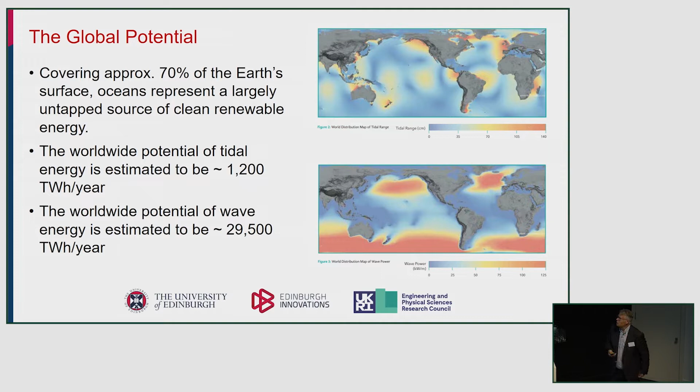Then what about the technology itself? So we've got wave and tidal technology. The first that I'll cover is tidal.

This is a device from Orbital Marine Power. They're an Edinburgh-based company that we collaborate with here at the university. They have what they call their O2 device. It is a nascent, emerging technology. This is the first full-scale commercial prototype that they're deploying in a commercial environment. Its capacity is 2 megawatts, so that gives you the opportunity that could power in excess of 2,000 homes. So really quite a large and significant device.

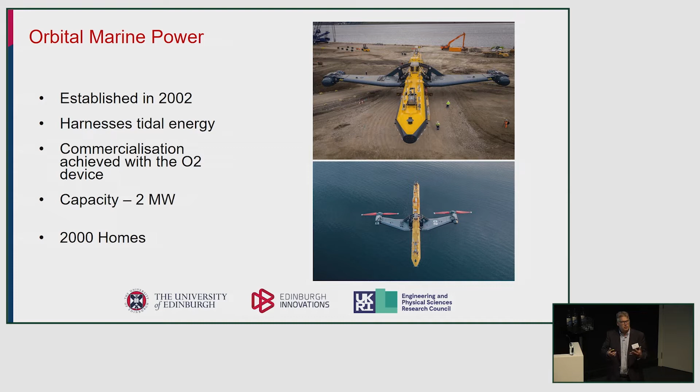You can see on the top screen there the people alongside it. It is extremely significant in size. And also you see it in its deployed position in the sea there. Although these look very impactful when we're looking at them on the screen in front of you here, there's almost no visual intrusion at all once they're several kilometres out at sea.

Sticking with tidal, another Edinburgh-based company we collaborate with is Nova Innovation. They have a much smaller device at 100 kilowatts. They have 6 of these devices deployed in an array system, a tidal energy farm in the Shetland Islands, and they're currently using that to supply the local grid and decarbonise the electricity system in the Shetlands.

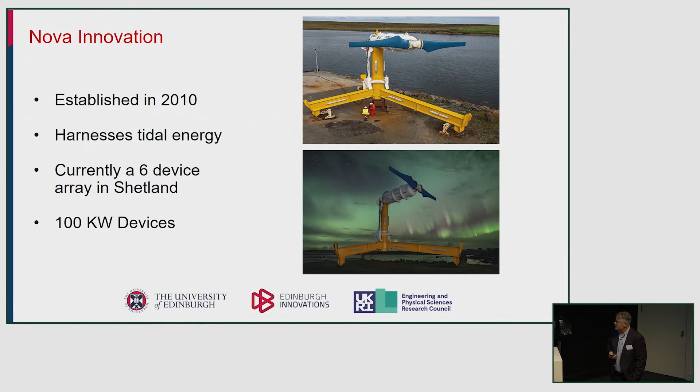Moving to wave power, if I said that tidal energy was an emerging, nascent technology, I would say that wave energy is probably 5 years behind it. The technology there is still getting design convergence and it's still being tested. This is another Edinburgh-based company, Mocean Energy. They have a 10 kilowatt prototype that's being tested currently at the Marine Energy Test Centre in Orkney, where many of the world's devices are tested.

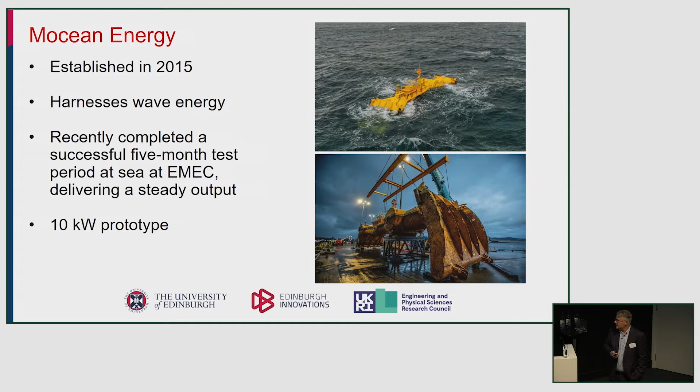But not to think that all the devices in the world are based in Edinburgh, I've picked one example here of wave energy from Sweden. They have tested their device in Scotland, at the Marine Energy Centre in Orkney. It's a smaller device of several hundred kilowatts, but they will operate them in 10 megawatt clusters, so much bigger farms in a similar way to wind. Hopefully that's given you a flavour of the types of technologies that are out there that we're using to capture that untapped resource that's available.

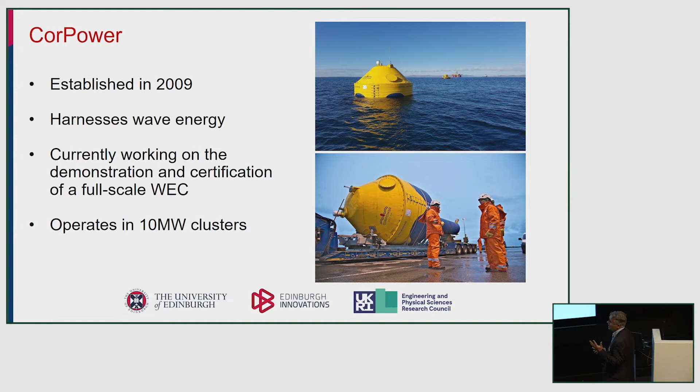But then, what's the benefits of doing that? How much could we deploy? If we look at what we could do at a UK level, if we were to meet the targets for the cost of this technology set out by the European Commission in their Strategic Energy Technology Plan, which are quite modest, then we've done modelling within the university that shows there could be up to 12 gigawatts of both wave and tidal power by 2050.

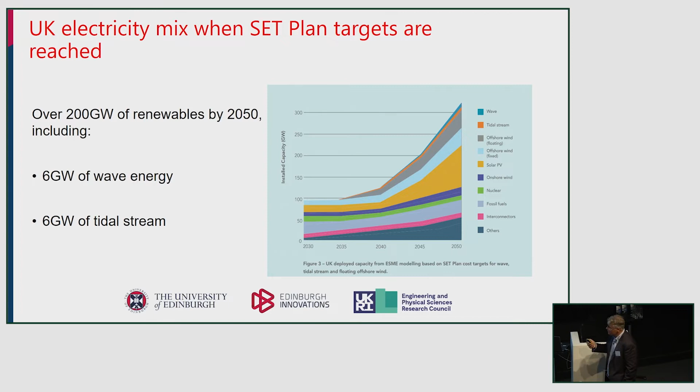And if you were to reduce that cost, then we would deploy even more in the energy mix. So anywhere between 5 and 10% of all the renewables that we have in the system could at least come from wave and tidal power in the future. So maybe modest overall, but still a very significant part of the overall energy mix and the decarbonisation of the UK energy mix. But if we were to do that, and successful in doing that, even with those modest amounts, what does that mean for overall society?

So what that means in terms of financial benefit is really quite significant with regard to the number of jobs. In the case of many renewables, we're importing them from overseas, whereas with wave and tidal power, you can see from the number of Scottish technologies that I showed, we really are leading the way within Scotland and the UK with this technology, and hence a very large proportion of the supply chain is based in the UK and Scotland. So we could have anywhere between 16 and in excess of 40 billion of economic benefit to the UK economy. To put that in perspective, it's double the automotive, or almost 3 times the entire UK automotive sector, bigger than the entire telecom sector, and almost a third of the entire UK construction sector. So it's a very significant part of the UK economy potentially in the future.

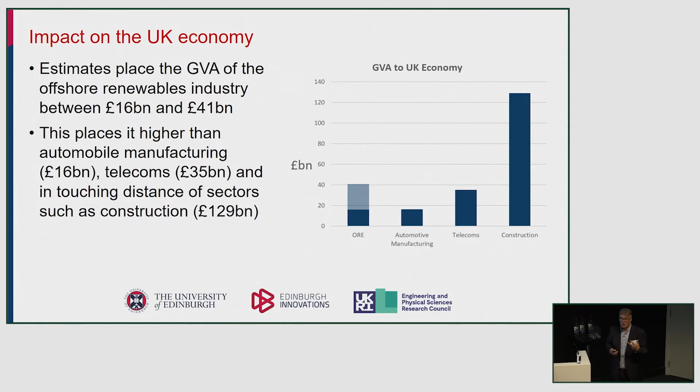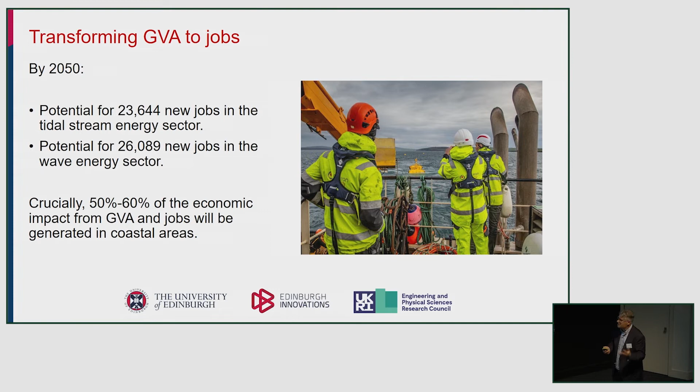And how does that translate to jobs? We could have approximately 50,000 jobs by 2050 from this sector, playing a real part in the just transition. And probably the most crucial part here is that the vast majority of these jobs will be based in coastal areas, where historically these have been fragile communities at risk of depopulation. So the right jobs in the right place is the message to take away here.

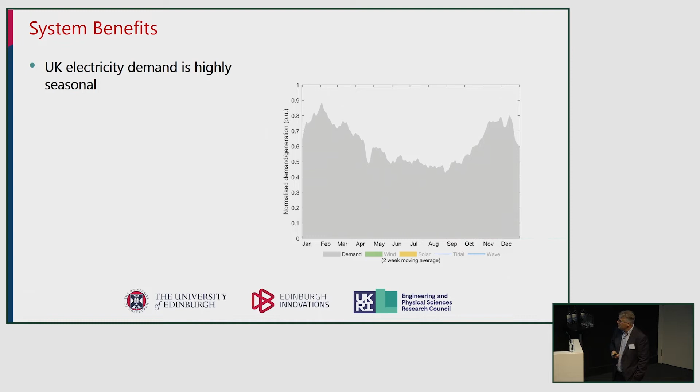Thinking about what this does as we move towards 2050 in the overall UK energy system, we will hopefully have more and more renewables in the system as we move towards a decarbonised overall supply. The electricity demand in the UK is highly seasonal — we have much higher demand in winter than in summer, and this grey block shows the overall profile of our electricity use. If you map wind generation onto that, it's reasonable, since it's windier in winter than summer, but quite often there are grey peaks where there aren't green peaks, which creates a real problem for how we balance the overall system. If we bring in solar, it actually makes things worse, since we have lots of solar power in the summer when we don't necessarily need it, but not nearly as much in winter when we definitely need it.

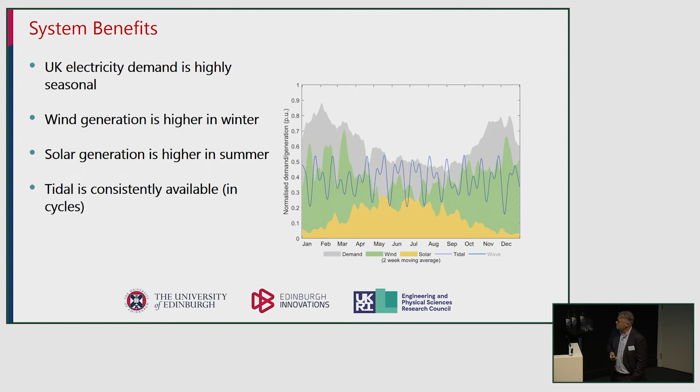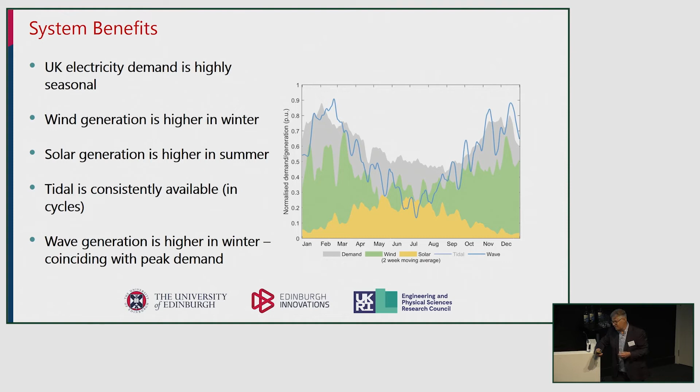So what happens if we bring in wave and tidal? Tidal is cyclical, and you can forecast that for hundreds of years in advance, so we can look at almost like a varying base load in the middle there, which will help balance the overall system. But if we bring in wave power, it almost matches completely — it really helps match the supply with the demand. So as we have much more offshore wind, onshore wind and solar in the system, wave and tidal is a real enabler to helping balance the overall grid. And when I say helping balance the grid, it makes it cheaper to balance, so there's a benefit to the electricity companies and the bill payer. But there's also a huge benefit to decarbonisation — for every peak in demand that wave and tidal power helps remove, that's less gas turbines being used to meet that demand. So you're decarbonising the grid at the same time, a real enabling benefit there.

So my takeaway message for why we're interested in this sector is that, as I've just described, it is a real enabler for net zero. As we have much more intermittent renewables going into our system to meet our net zero targets, wave and tidal power really makes it easier to balance the overall UK system. And at the same time, because this technology is currently being led at UK level, and I would even say at a Scottish level, it really brings high quality jobs and economic benefits — those jobs in the right place. So potentially having a big addition to a just transition as well as meeting the net zero targets.

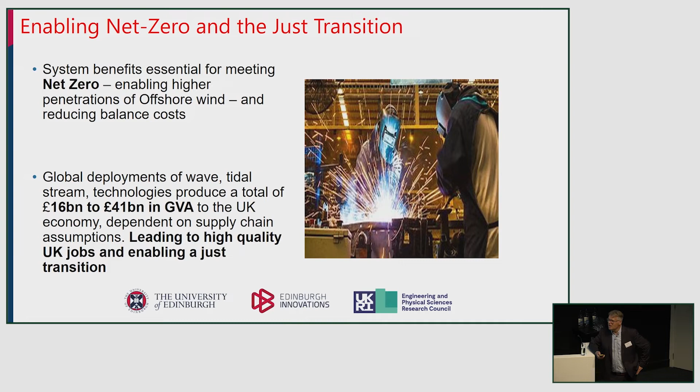So what are we doing at the University of Edinburgh? Hopefully I've given you an overview of the potential, the resource, and the potential benefits that we have. What are we doing at Edinburgh to help support this emerging sector? Well, first of all, we have some fantastic facilities, and first I'll cover the FloWave test facility based at our King's Buildings campus.

Opened in 2016, it is the most sophisticated test tank in the world for testing wave and tidal devices. It's a 25-meter diameter pool, covered in wave paddles. Below the surface it has tidal turbines generating tidal flows throughout the pool.

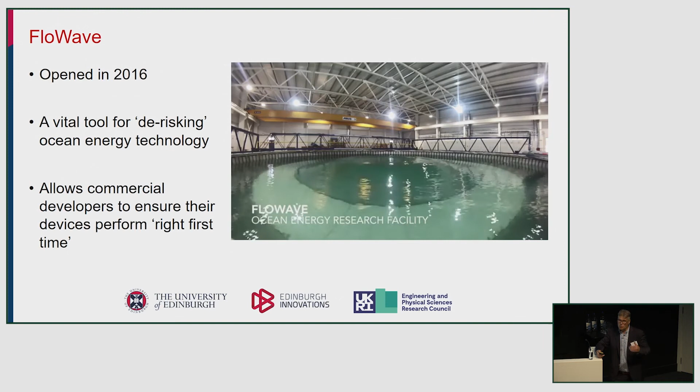We can generate and simulate test conditions for any site in the world at any location. All of the tidal and wave developers you've seen slides for today have tested and de-risked their devices in the FloWave test facility, as well as many other devices from the UK, Europe and around the world, all making their way to Edinburgh's FloWave test facility to de-risk the technology before it moves into harsh offshore conditions.

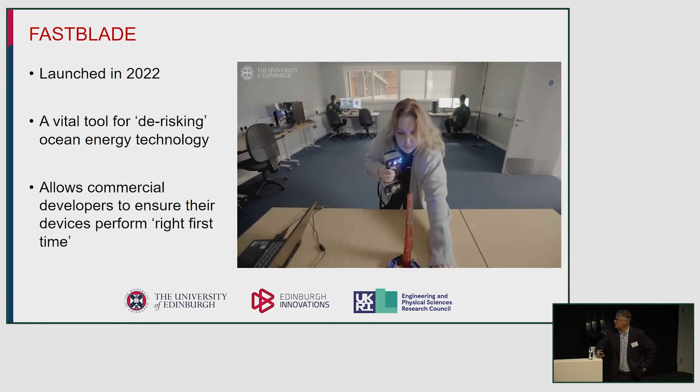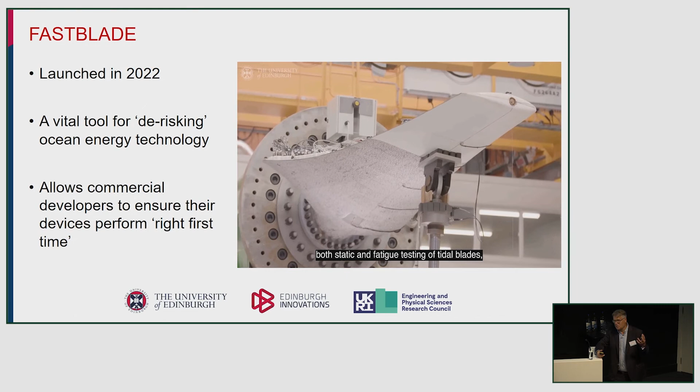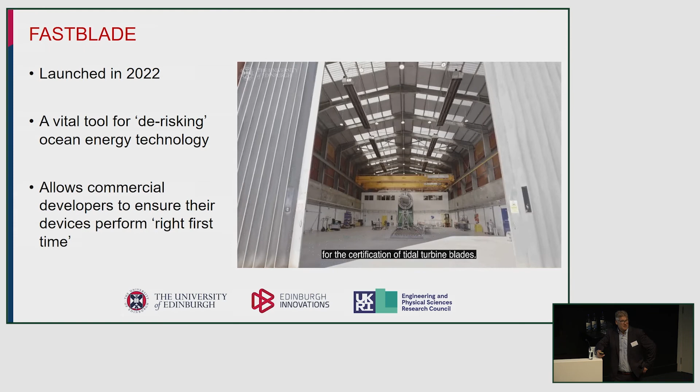As well as the devices themselves, we have a brand new test facility that just opened earlier this year, the FastBlade test facility. As well as testing overall devices, we have the world's first tidal blade testing system, based in conjunction with Babcock in Rosyth on their site across the bridge. It's a world-leading test facility to de-risk the technology of tidal turbine blades before they go into harsh conditions.

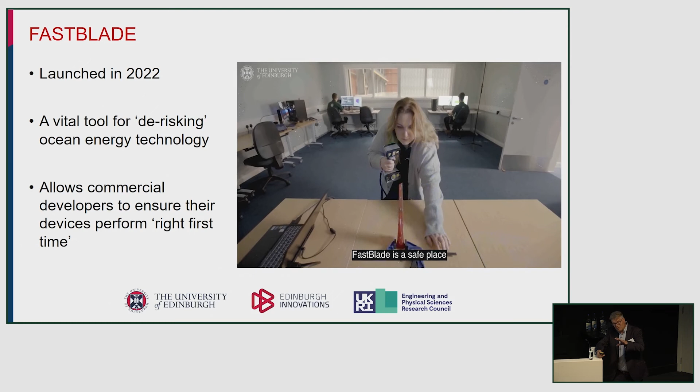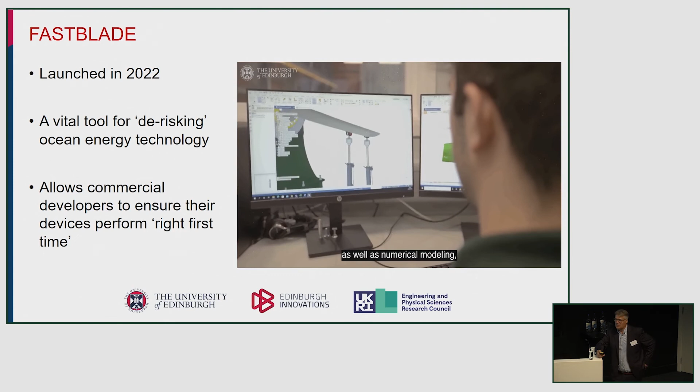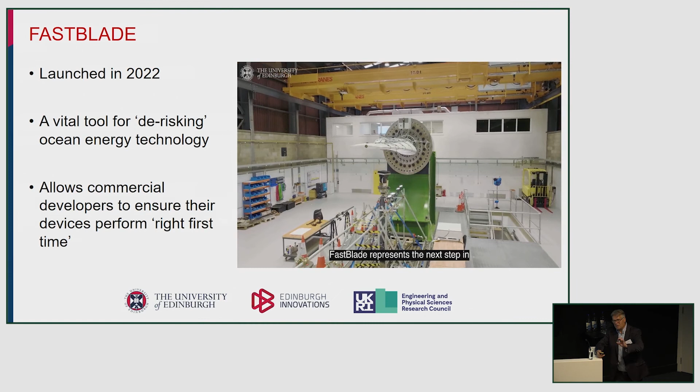One of the things they're exploring with developers currently is whether we can have a fully recyclable blade. I'm sure they'll be very interested to speak to you, Jenny, about opportunities for a fully recyclable blade, so that the life cycle assessment and overall carbon savings from energy production make sure the life cycle assessment of the technology also adds to the net zero goals.

Finally, this is my own group, the Policy and Innovation Group. We work predominantly not with technology development itself, but with technology developers and governments to make sure the innovations Charlotte mentioned are matched with policies that can support them. We work with companies, regional governments, national governments, and international organisations to make sure we've got the right policies in the right place, at the right time, at the right levels.

At any one time we can have up to nearly 20 projects running with values of around 70 million, and maybe 200 international partners we're dealing with across those projects. Many of you in the room may already be some of these 200 partners, but if not, hopefully you will be in the future.

One of the roles we have, which Charlotte mentioned, is that we represent the UK government. We represent BEIS in their role within the International Energy Agency, which brings together collaborations in ocean energy across 25 countries. I'm going to show you a short clip of what they're doing.

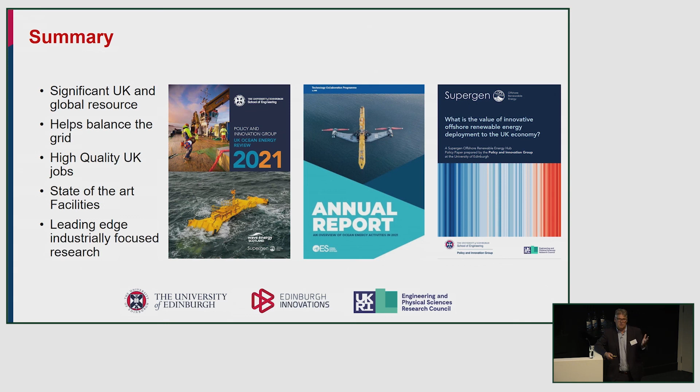There are a large number of countries internationally. They come together in the intergovernmental organisation, the IEA Technology Collaboration Programme, in which we represent the UK. I'm going to show you a video that lasts just two or three minutes, which hopefully rounds things off with not just the UK story, but also the international story.

Thank you for indulging me in that last presentation. Hopefully you feel informed by the UK opportunity, and marginally inspired by that video of the international opportunity. Thank you very much.